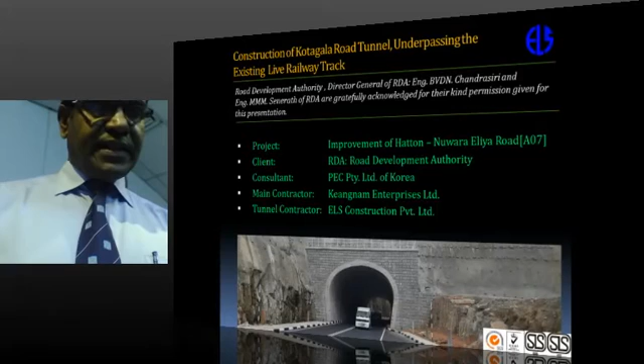The speaker today is Dr. Samaradivakara. He graduated from University of Moratuwa in 1978, obtained his BSc in Mining and Mineral Engineering, then Master of Engineering in Geotechnical Engineering from the same university in 2002, then MPhil in Rock Mechanics from University of Moratuwa in 2006, and PhD in Mineral Engineering from University of Queensland, Brisbane. Those are his academic qualifications.

In industry, from 1998 he joined as Geotechnical Engineer in Engineering and Laboratory Services Private Limited. Later he joined University of Moratuwa as a visiting lecturer, then a full-time lecturer. He then worked as senior project engineer at Newcrest Mining Limited, Australia, and before that as senior geotechnical engineer at ELS Construction Private Limited, during which time this tunnel was constructed. Presently, he is a senior lecturer at University of Moratuwa.

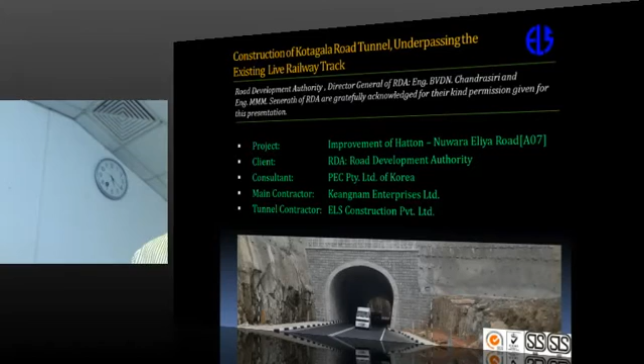The project is the improvement of the Hatton Nuwara Eliya Road Project, A7 Road. The client is the Road Development Authority Sri Lanka. The consultant is PEC Private Limited, Korea. The main contractor is Keangnam Enterprises Limited, and the tunnel contractor was ELS Construction Private Limited.

From a scientific point of view, this is a direct application of geotechnical, mining and civil engineering knowledge and experience. It was our absolute pleasure to work for and dedicate ourselves to this particular project. As Mr. Prabodha explained, this is the first road tunnel built by Sri Lankans.

I have organized this presentation so that even non-engineers can understand it; I have made it very simple. I am going to talk under these subtopics: site layout and background to the project, subsurface profile, safe work practice, slope protection work, and tunnel design drawings. Then tunnel excavation at the Hatton end, that is the hard rock section, and safe tunneling practice, monitoring and quality assurance work, tunnel excavation at the Nuwara Eliya end where we had to practice soft ground tunneling techniques. Then the tunnel waterproofing and tunnel concrete lining. This presentation will take approximately an hour.

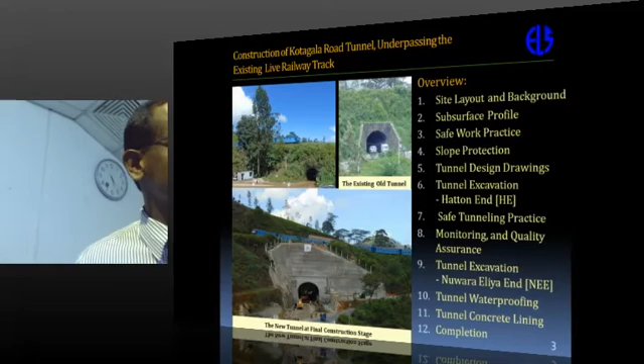This is the former road, meaning the Hatton Nuwara Eliya road. Under this A7 improvement project, it was proposed to improve this to a 2-lane road. The old tunnel shown here is just sufficient for one-way traffic, and it had been a bottleneck on this Colombo Nuwara Eliya road over the years. I checked the history of the tunnel; it's more than 100 years old, and therefore it had been a mandatory requirement to go for a new tunnel to cater to the current traffic demand.

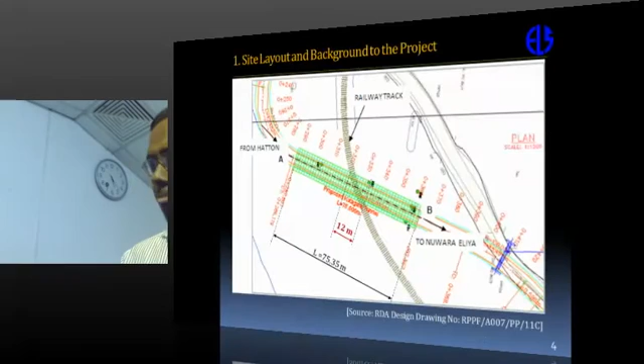The old tunnel is somewhere here, and this is the existing railway track. By the time I arrived from Australia, the tunnel axis and everything had already been finalized and diverted. This is the new tunnel, which after construction we measured at a length of 75.35 meters at the road level.

The most interesting part is this: we had to construct this underpassing the existing railway track, and the railway track doesn't intersect the tunnel perpendicularly, it's on a curvature. Rail to rail, it is just 1.9 meters. Otherwise the length of influence would have been much less, but given this current situation we recognized the length of influence as 12 meters, which is significant, and we had to take precautionary measures to excavate the tunnel under the railway line carefully.

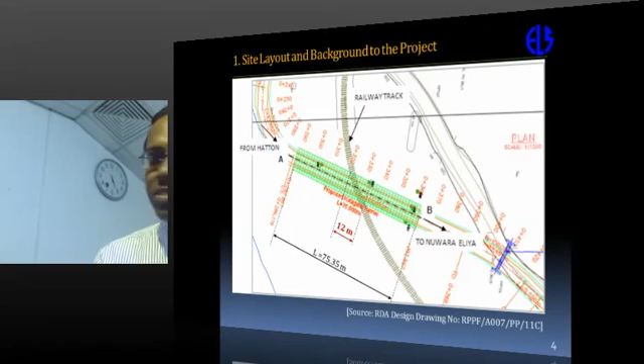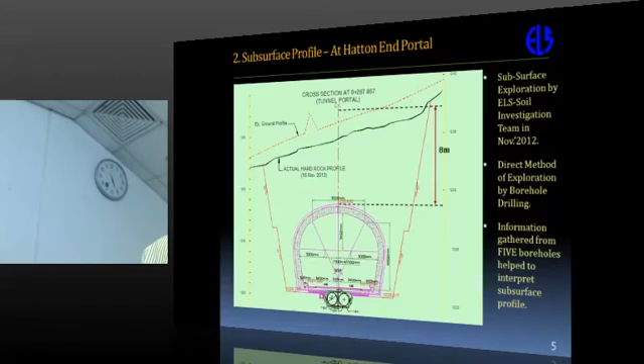This is a borehole. There had been 5 boreholes conducted: one advanced here, the second one BH2 advanced very close to the railway track, and the other 3 at Nuwara Eliya.

This is a sample from the borehole advanced closer to the railway track. It should actually be within the tunnel, because there's an overburden of 8 meters, then 9 to 14 meters. I wouldn't say this is good rock, you can see it is fractured. However, core recovery was 90 to 100%, and RQD 60 to 100%. It is a bedded formation.

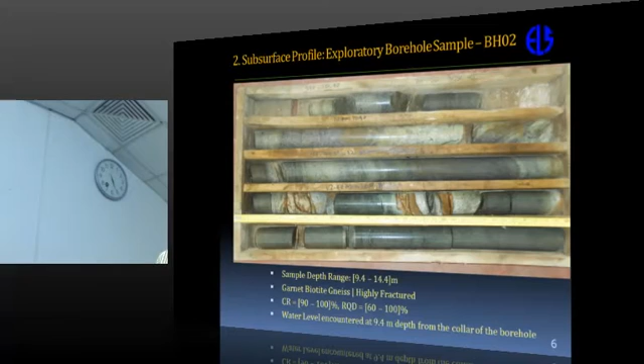Especially for the trench excavation, we faced difficulties during blasting because of the bedded formation.

We recruited more than, sometimes we had more than 120 people on site, recruited especially for this particular project. Actually, 90% of the workers were non-ELS originally. We interviewed and recruited them for this particular project. Then we needed to control them, guide them, and make them disciplined. Therefore, we needed regular communication, especially on the safety aspect.

This is the biggest project. ELS spent a lot of money for safety. Therefore, we looked after workers, and I'm sure we maintained world-class health and safety standards.

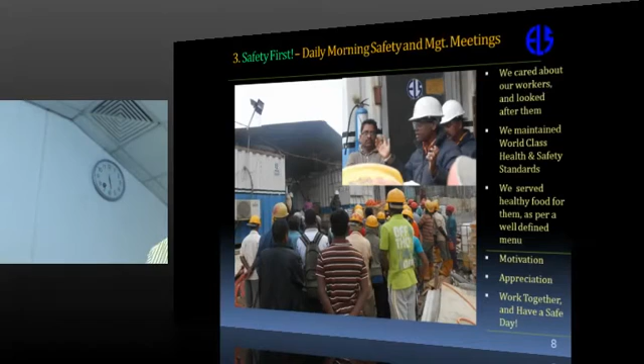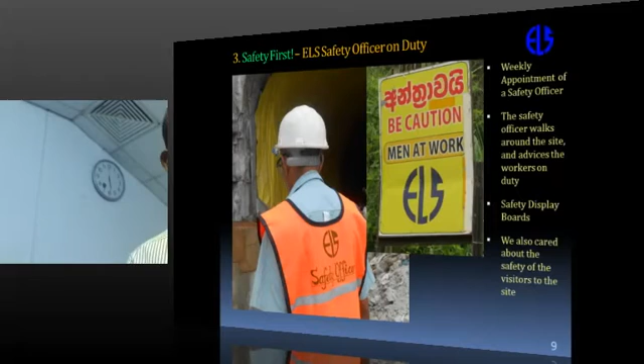We appointed a safety officer on a weekly basis out of our work team, and his role was to walk around and see how the guys are doing, whether they are wearing safety items, and point out any risky thing to the management. That's how we managed safety.

We also established fire safety on site. We installed dry powder fire extinguishers on site as well as at staff accommodation. Not only that, we invited the service provider to come to the site and give on-site training for our workers.

By doing this, we achieved zero accidents and zero complaints by the end of the project. That's a term I learned in Australia. When I landed on a remote mine site in Perth, I could see at the airport: target zero accidents and zero complaints today. It digested in my blood.

Zero accidents we understand, but zero complaints means a lot. If I don't get complaints from my directors, my consultants, colleagues, then it is a peaceful day. I can have a good day.

We practiced this, we tried this, and we understood these are correct. You can see this is a photograph of drilling using a YT23 jackhammer with pusher drill. They are wearing all safety devices.

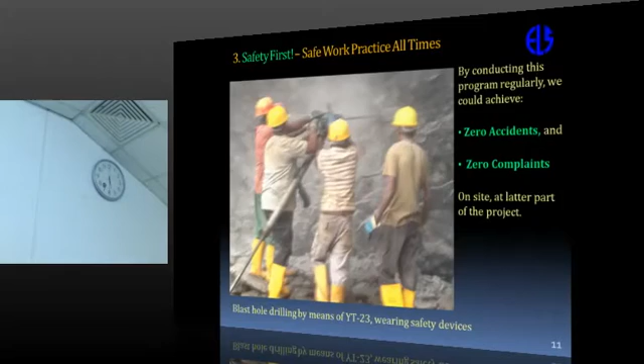That's about safety, and we were lucky actually. There were no catastrophic accidents, just one worker's finger was broken. We could minimize accidents to that level. Therefore we were happy, and capable of celebrating important events enthusiastically because there were no accidents on site.

The access roads also had to be stabilized, because we could see this happening at the portal. At the beginning we didn't have this much rock excavation, however above this soil excavation we could observe it is a lateritic soil formation. However, it is not that stable, there was a chance it could slip. Then we consulted...

We consulted CECB and requested them to come up with a proposal to stabilize this slope before starting the tunnel. We received their proposal to go for soil nailing, and we could stabilize these slopes using soil nailing techniques.

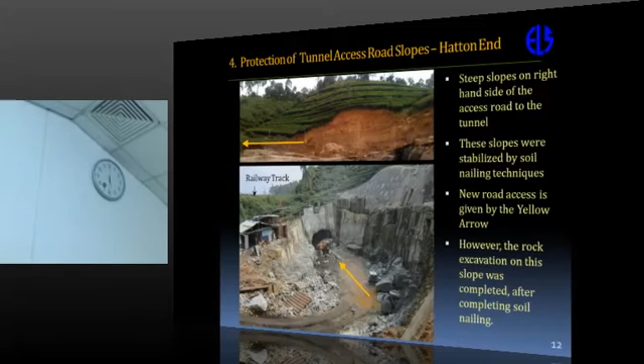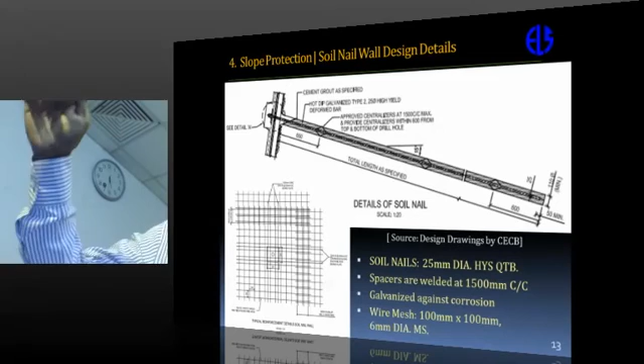Soil nails are made out of 25mm diameter high-yield steel QT bars. We drill 100mm diameter holes and need to place the soil nails at the center of the hole. For that we use centralizers to keep the soil nails at the center, welding these centralizers at 1500mm spacing.

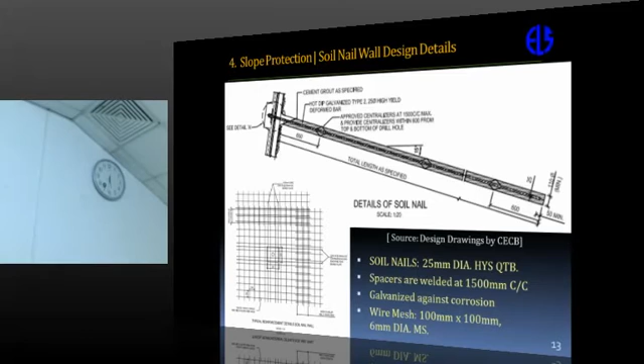Eventually we galvanize the entire setup to prevent corrosion. Then after installation we need to do grouting, and this is the wire mesh, 100mm by 100mm, 6mm diameter mild steel wire mesh, used throughout the tunnel and slope protection work by soil nailing techniques.

This is a close detail of the soil nail head. This is the soil nail and this is the grouted form. Initially we go for 75mm shotcrete, then wire mesh, then all the nuts and bolts and plates, all galvanized and fabricated by us. That's how the soil nail is installed.

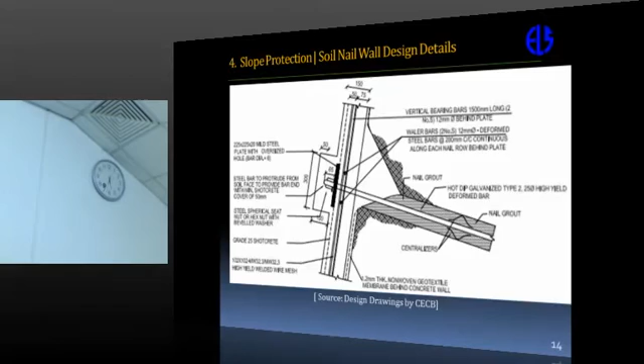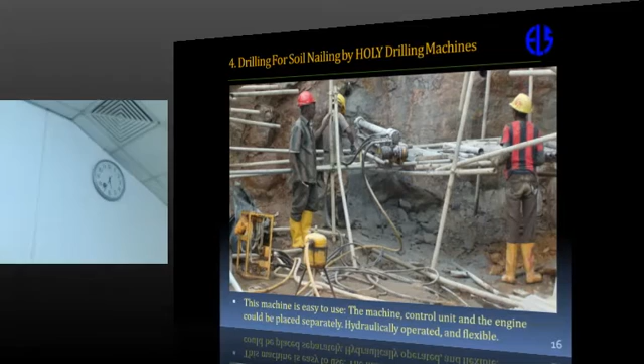This is very flexible, and at the moment this set of machines is being used by ELS for slope stability work at Nanu Oya, close to the railway station.

This is a protected slope at Hatton. You can see the drainage was facilitated by a surface cut-off drain built here, and vertical drains built by means of no-fines concrete. This is under quality assurance work - we have to do 5% pull-out tests for the entire soil nail wall.

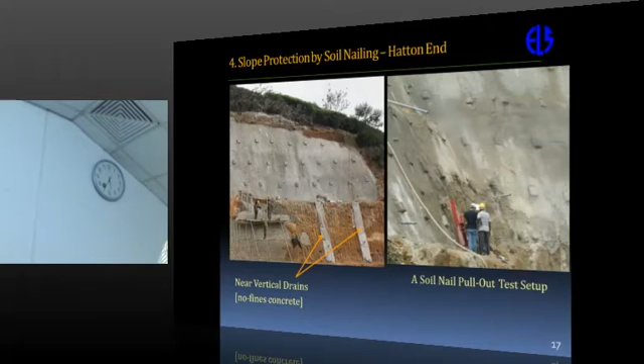This is the slope protection at the Nuwara Eliya end slope, meaning the portal slope itself had to be protected by soil nailing technique. That design we got from RDA. There were minor differences between the CCP design and this design, but eventually the length was increased as it is the same formation.

Soil nail lengths were initially 6 meters, but they were increased up to 10 meters in depth.

This photograph is from Nuwara Eliya, showing the Nuwara Eliya portal slope face. The tunnel was supposed to be here. The stabilization work is still going on.

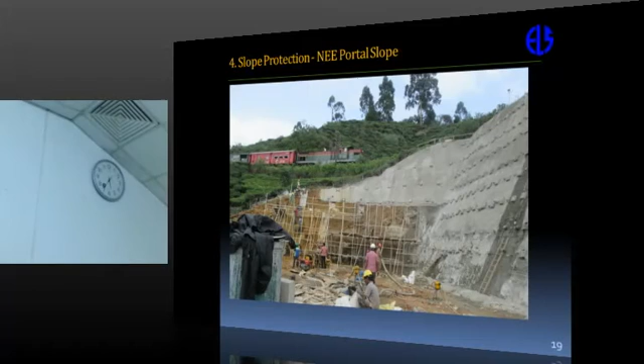I selected this photograph just to show how close we were to the train - it's very close. Once the earth movements from excavation were done, we needed to protect this slope as soon as possible. Our boys worked day and night, double shift, to protect it before heavy rains fell. That way we ensured the safety of the structure.

As engineers we should not restrict ourselves to just the design part, so I've included a couple of design drawings here. Thanks to RDA, I have quoted the source of material. This is actually the drainage we revised later.

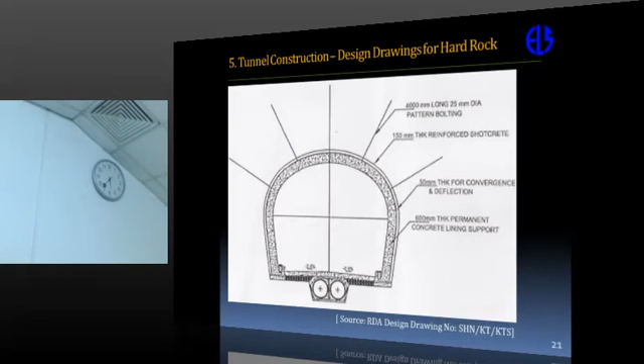It was confined to one single line of 1200 millimeter internal diameter precast concrete pipe. You can also see a lot of pattern bolts in the design, 4 meters long and 25 millimeters diameter, then 150mm thick reinforced shotcrete, 50mm thick for convergence and deflection, then 600mm thick permanent concrete lining support. That is the design for the Hatton hard rock section.

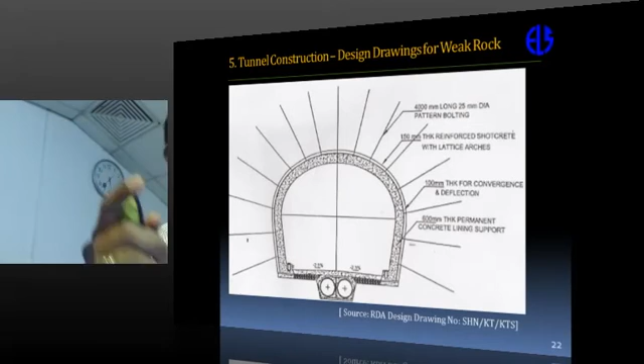For the next section, soft weak rock formation, you can see the number of pattern bolts increased. As part of these design drawings, whenever necessary we have to do spot bolting to support loose formations, installing anchor bolts separately.

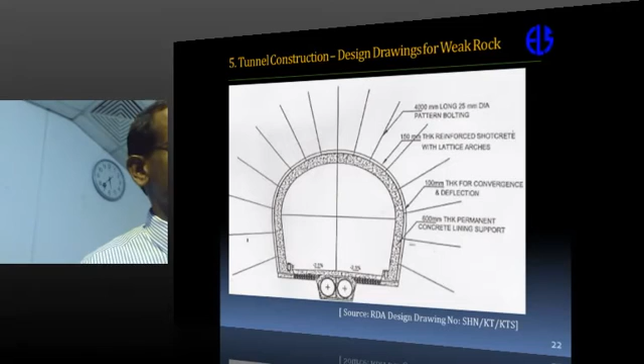When we come to the hard rock section tunneling, we did up to 50.5 meters length starting from the Hatton end, then advanced from both ends. We started from Hatton end with rock tunneling - drilling, charging and blasting - whereas from the Nuwara Eliya end we had to practice soft ground tunneling techniques using lattice arches.

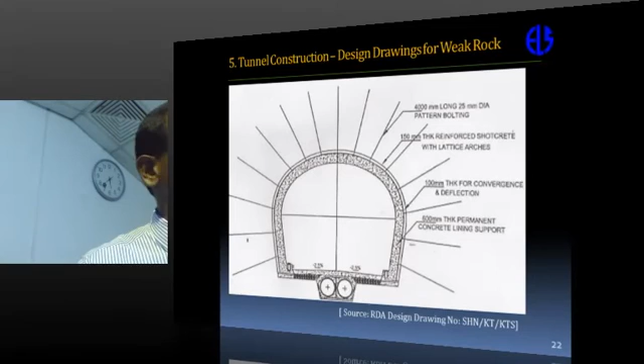As per the design, we had to advance 54 millimeter diameter, 12 meter long heavy duty pipes, which we call forepoles. They were perforated, and after drilling and installation, we did pressure grouting. So you can imagine that a blanket is formed above this level, making stable strata and facilitating advancement of the excavation.

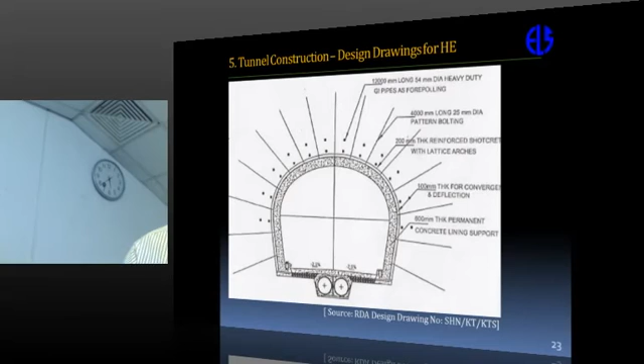These are the forepolings. You can see the actual forepolings we advanced and grouted. After that we started excavation. By that time we had already done slope protection work by soil nailing. Then we started the excavation for the installation of the lattice arches.

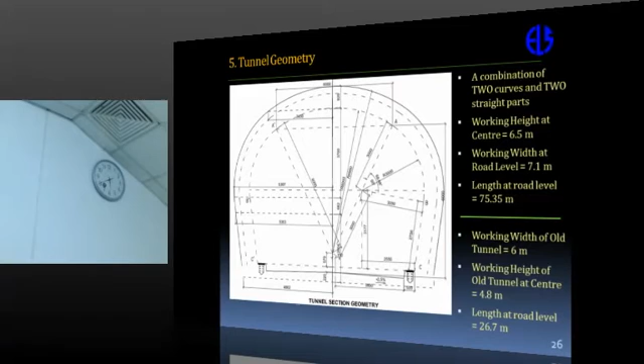After completion, the working height at the center is 6.5 meters, whereas the old tunnel had only 4.8 meter height. The working width at road level in the new tunnel is 7.1 meters, whereas the old tunnel got just 6 meters. And lengthwise, the new tunnel is 75.35 meters, while the old tunnel was 26.7 meters.

This is the fabrication of the lattice arch. Mr. Bandara did this based on his Samanala power tunnel experience. He pulled out his old notes from the Samanala records, and we fabricated this one.

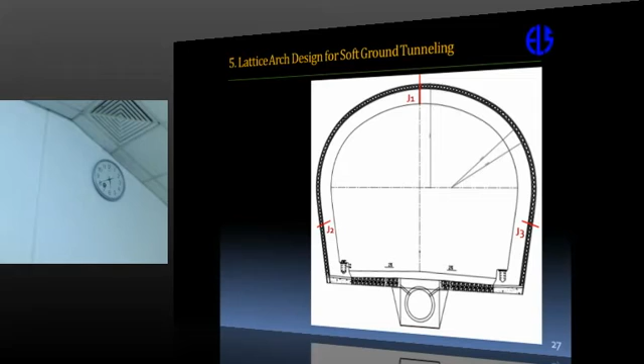We put it here. We maintain 3 joints: Joint 1 at the crest, and J2 and J3, which are at the places I mentioned, the straight parts. The sectional view of it is made out. These were made out of 32 millimeter diameter HYSD QT bars, and you can see shear bars in between. That's how we fabricated this.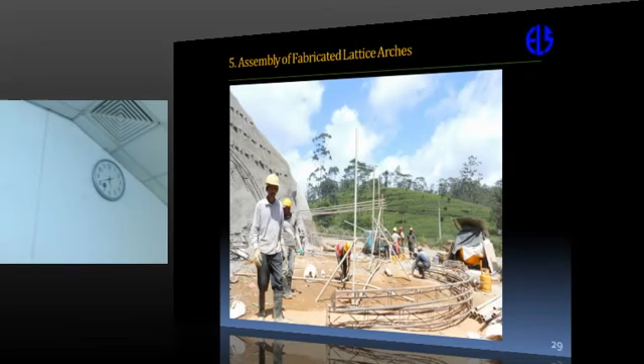As I explained earlier, we moved them in 4 pieces, each lattice arch, and assembled on site. These are the lattice arches, temporary supports for the soft ground tunneling, which we did at Nuwara Eliya.

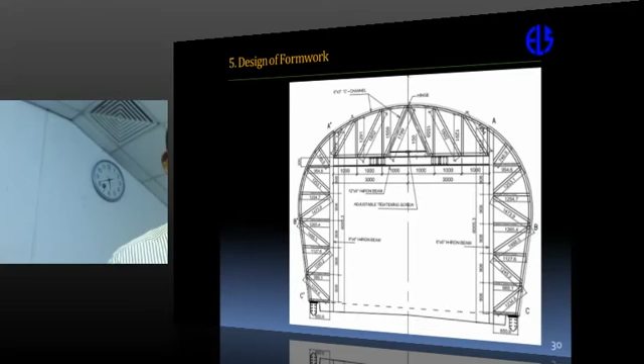The fabrication of formwork for the permanent concrete lining: we use C channels and I-beams for this fabrication. This was also fabricated in pieces at the ELS Bemmulla factory premises, and we moved them in pieces to the site and assembled on site when it was ready for the concrete lining of the tunnel.

These were moved by crane and positioned, and that's how we made the arrangement for concrete lining of the tunnel.

The tunnel excavation was hard rock tunneling in Hatton. We did it in 2 steps. The first part, starting from ground level, was below 4.5 meter height, which we did first. For that we used YT23 jackhammers with pusher legs. We did it horizontally, and charge blast. That was the heading operation, initially only for 4.5 meter maximum height.

Then for the balance 3.5 meter depth, we had to drill vertically downwards, and we did bench blasting for the bottom part. That's how the rock excavation was done.

This shows the YT23 jackhammer. At the moment the company has 11 machines. This is a pneumatically operated machine, and it's pretty heavy. However, when energized with compressed air, the leg itself can raise the machine up, so even a single person can operate it. But at the beginning, for the drill rod, someone should support positioning to the correct drill hole location. Once the tuning up is done, even one single person can manage to complete the drilling.

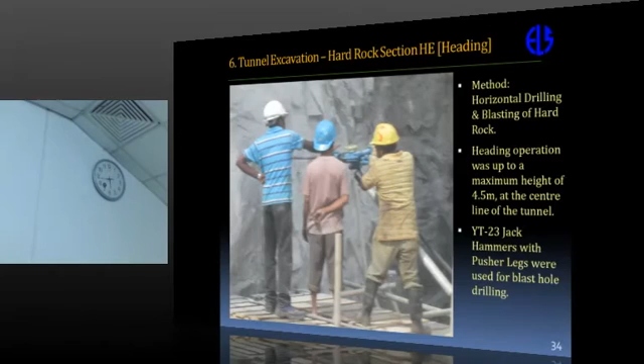Mr. Champika is in our audience today.

Then we consulted a blasting expert, engineer Mr. P.V. Hemal from University of Moratuwa, and he supported finalizing this blast design. Here we use emulsion explosive, which is becoming more popular. We couldn't do blasting carelessly here because we had to take very careful precautions due to the railway track. If it was an isolated location, we could have done faster blasting during excavation, but here we had to take utmost care because of the railway track.

Emulsion is less powerful than dyna, though at the moment dyna is also not recommended. Strength-wise, dyna is more powerful than emulsion. However, from a scientific point of view, dyna emits more chemical fumes during blasting, whereas emulsion has fewer emissions, and therefore emulsion is becoming popular.

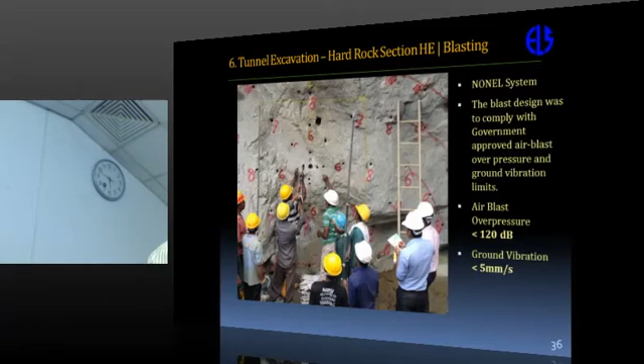These are the parameters for air blast overpressure. We cannot exceed 120 decibels, and we cannot exceed ground vibration of 5 millimeters per second. We were within the limits, and the Geological Survey and Mines Bureau officers cooperated very well. This is our foreman, who played a great role during this tunneling project jointly with Mr. Champika Karunathila.

Further, to stop fly rock and ensure no fly rock came out, we built a shield out of sheet piles, handled by this Manitou crane. We ensured this because there were houses towards this end, in the vicinity, and we needed to make sure that not even a tiny rock would be flown to their houses and cause damage.

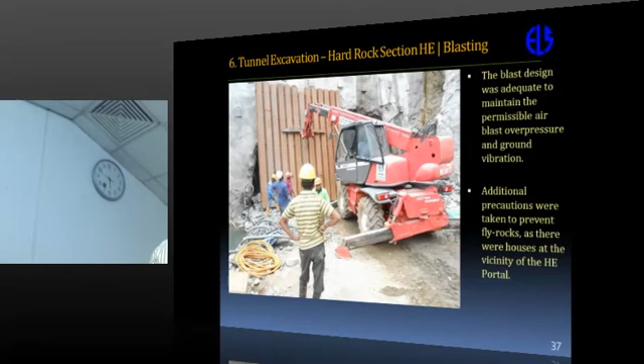We didn't want complaints. We targeted zero complaints, as I explained earlier, along with zero accidents. We always tried to minimize those.

We had to fabricate a bench for blasting, because on this platform we could accommodate 3 drill machines, then 4 drill machines underneath, and that's how we managed to blast that many holes, 194 holes per one blast phase. People worked day and night.

We had accommodated people and organized 2 shifts to work. That's how we managed to do this excavation.

As the tunnel was advancing from both ends, we did regular survey checks to ensure the tunnel was heading according to design and following the center line. Those checks were done regularly, and survey also helped to draw and position the blast holes for the team, along with alignment checks.

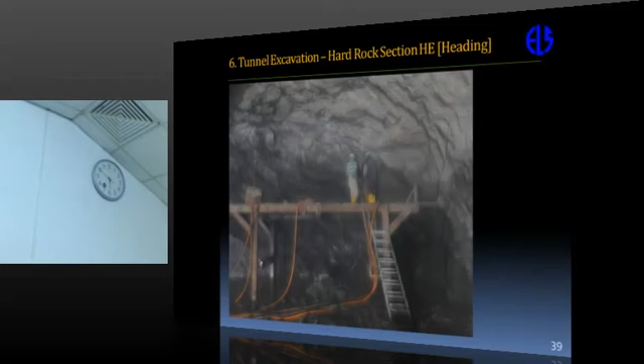You can see here these wires are coming for 3 machines, and this is the drilling platform used to approach higher levels, higher elevations, to drill more holes.

Night shift, whether it was cold, rainy or windy, our people went ahead with utmost courage. Night shift was absolutely very cold up in Hatton, freezing in the morning, sometimes foggy. Even I remember driving back to accommodation when visibility was very poor, after 9:30, 10 o'clock, sometimes following the side white line of the road just to locate it. But people worked very hard during the very cold and rainy weather.

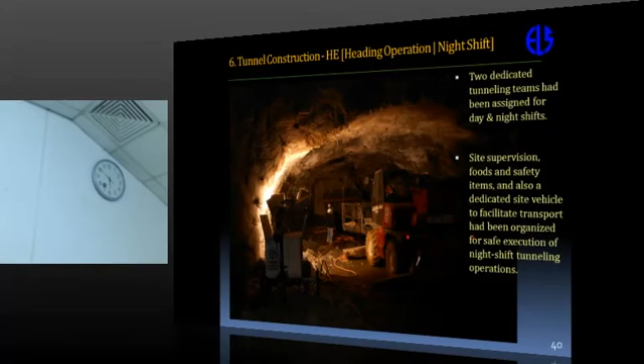Our team was very strong, and they had the enthusiasm to go ahead. This Manitou crane helped a lot, it is a very flexible machine for lifting people, and it also has the facility to accommodate a jackhammer to drill a hole from this cage. That helped throughout the project, and now the company is considering buying a second machine.

We use these for removal of muck from the blasting.

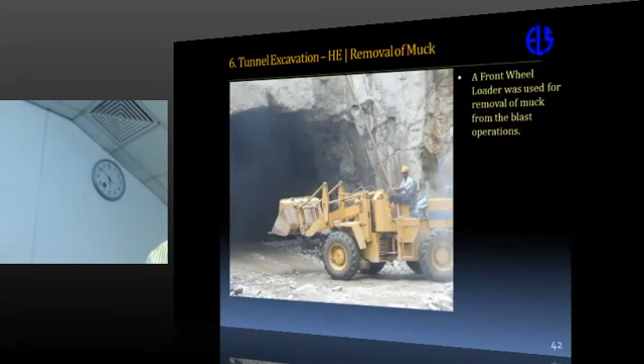After finishing the heading operation, our people started benching. That is, as I explained, downward drilling. It is fast and easy, and it's the general practice at quarry mining or bench blasting.

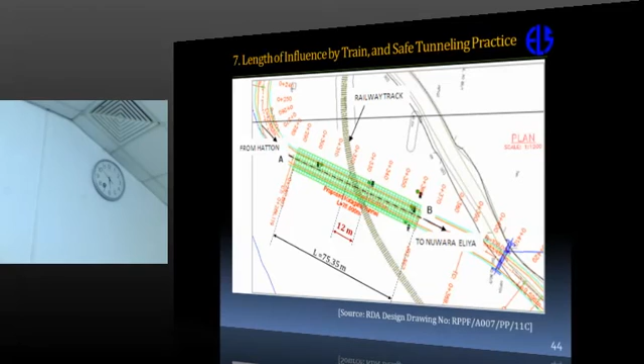Again, I am going to explain the precautionary measures we took under the railway track when we were advancing this 12-meter stretch. The weight of a train engine, needed to keep traction, is the heaviest part of the train.

I spoke to a schoolmate who is an engine driver. I rang him last evening and checked the weight again. He said don't hesitate to mention that the heaviest engine is the 120 ton heavy one, the M10 model which the government recently purchased from India. Therefore, the load could vary from 60 to 120 tons.

It's risky work. However, as per the instructions given by consultants and our basic rock mechanics knowledge, we took all precautionary measures to ensure we drilled one blast hole vertically upwards to check the rock thickness always. We were instructed to make sure we got a 5 meter thick rock layer over it before giving approval for the next blast.

That way, immediately after blast, during the mucking itself, we did supporting of all loosened rock parts. Further, for this particular 12 meter stretch, consultants agreed to give permission to go for shotcreting with a single layer wire mesh.

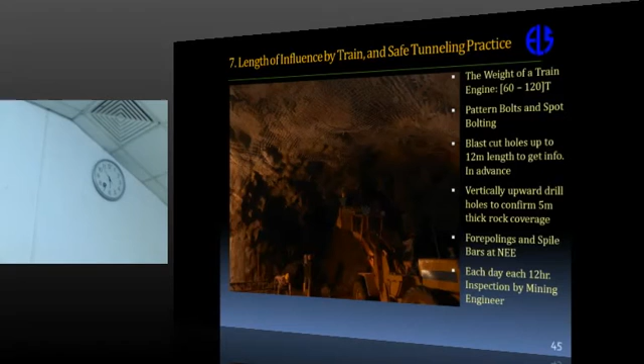The same wire mesh, we used throughout the project. This process means we did a 50 millimeter thick shotcrete layer first, then installed the wire mesh, or in some instances we managed to cut enough metal pieces and install first, then install the net, and simultaneously did the shotcrete. First layer 50 millimeter thick, then the wire mesh, then after, a 75 millimeter thick shotcrete layer.

Further, we have to do convergence and deflection monitoring. That was done by means of a tape extensometer, brand new, which the company bought especially for this particular project. This shows how the measurements were taken throughout almost 25 days.

But these are not significant. The deflection here is 0.25 millimeters. We installed hooks on the excavated surface at regular intervals, starting from Hatton to Nuwara Eliya, and our laboratory staff measure this every morning to ensure there are no significant movements in the excavation.

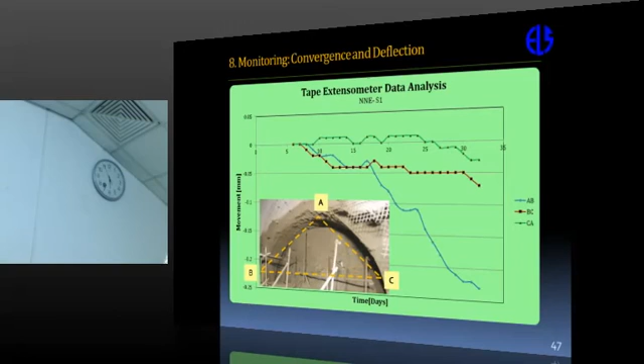This is taking of tape extensometer readings. This is a specimen of anchor pull-out test result. Similar to soil nail anchors, we did a lot of rock anchors, and we had to do quality assurance work by conducting pull-out tests.

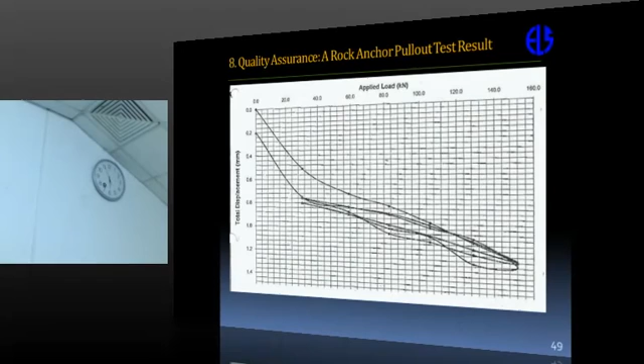It had been designed for 150 kilonewtons. You can see once we release the load, it has returned up to 0.2 millimeter deflection, which is negligible. Throughout the project, we maintained this quality assurance work with the presence of the consultants.

Again, the quality assurance of wet shotcrete spraying. We always cast panels out of the samples we used for wet shotcrete spraying. We had our own facility to do the coring and testing with the presence of consultants, and we did all testing at the consultants' laboratory.

Then for concreting, we did cube casting followed by testing to achieve the design 30 megapascals within 28 days. Then I would like to explain the tunneling process, so on tunneling.

You can see, after flow protection and forepoling, doing pressure grouting, only then we started excavation. We had been permitted only to attempt 600 millimeter excavation at a time, and then to install the rib or lattice arch. We had to do a lot of pattern bolts, grouting, shotcreting, then only we were permitted to advance further.

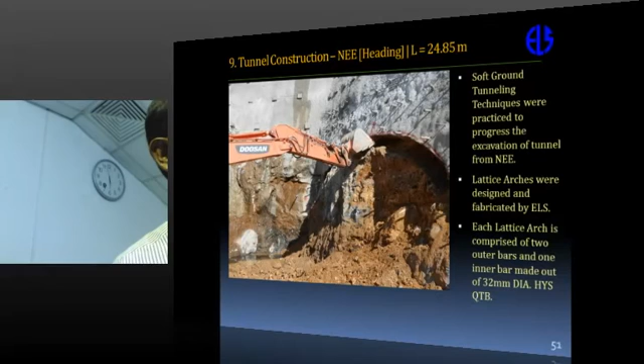You can see the soil here, it's highly decomposed rock. Another problem at this end was seepage of water; a lot of water was seeping at this end. Once contaminated with water, this soil drops like in lumps.

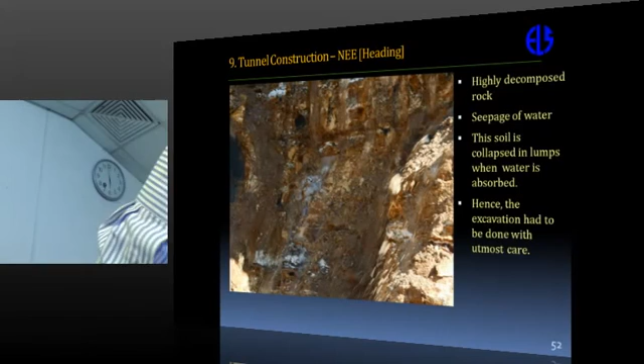When you try to excavate slowly, the soil drops. Therefore we instructed workers to look after them and wear safety devices, and we had to do it very carefully. After installation of a lattice arch, further excavation we also did very carefully.

You can see here, after installation of the first lattice arch. I put this diagram to remember that we need to do a lot of pattern bolts, drilling with a YT23 jackhammer to install these pattern bolts. Then we need to do grouting and shotcreting before advancing further.

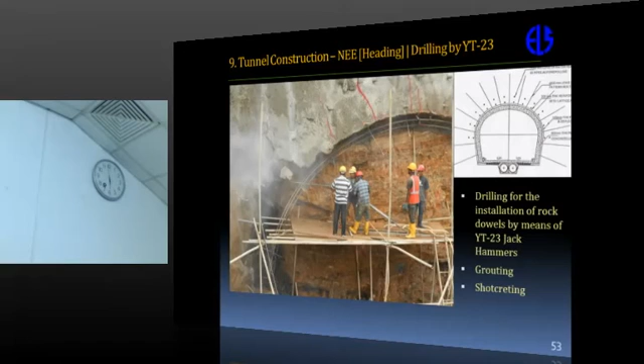Even though we planned this absolutely for soft ground tunneling, we encountered some rocks on and off. That was another trouble, because when we tried to cope up with the time schedule, we had to figure out how to do this blasting. The rock was not soft on the left hand side, the hilly side, that is competent rock, hard rock. We cannot take it simply from the excavator bucket. It doesn't work, so the next step is we need to go for control blast.

This has to be done very carefully, because if the blasting vibrations are significant, then collapse can happen. No one can predict the extent. It could come right from the top, and it will be a disaster. So it's something to be done very carefully and patiently.

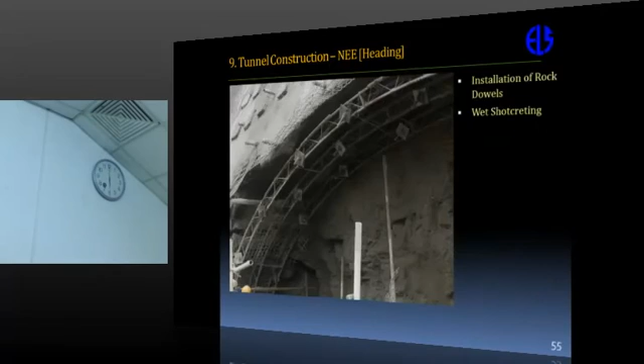This shows that after installation of these lattice arches, we have to do shotcreting. Then the bottom parts have over-excavation. This means sometimes we couldn't control the excavation to perfection because it's rock blasting. We need to balance things, rock blasting and excavation, and we need to advance forward also.

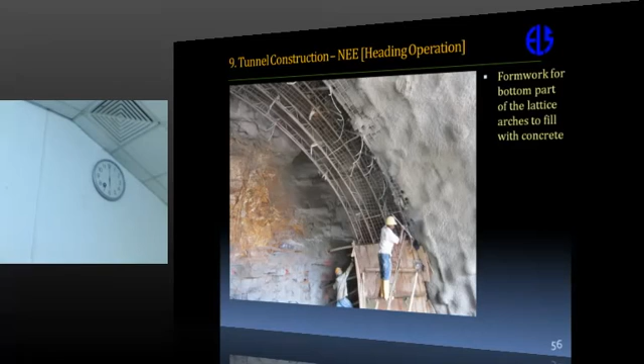We need to advance forward also. There were some extra excavations here. In such instances, we have to put some formwork and fill with either concrete or shotcreting as advised by the consultants. The wet shotcreting is in progress.

This wet shotcreting pump was brought brand new by ELS for this particular project. I was very lucky to work for this project.

It was the first job also I did. Still I have got connections with them because they work very fast.

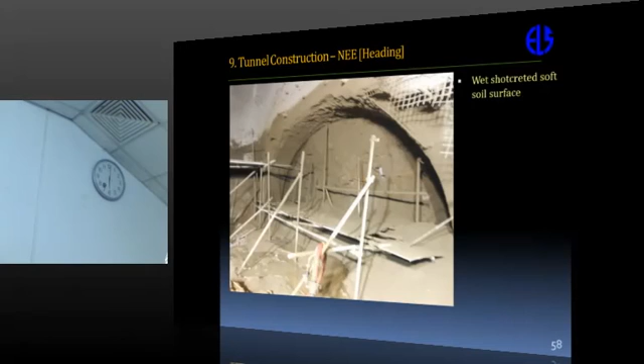When the soil ground condition was not that good, we did the shotcreting for the soil surface as well for safety. Then only we followed with the excavation.

The mobile crane, we shared at both ends because that was the most useful crane on site.

Nighttime work. We had diesel powered light generators. Sometimes during the night shift we got more light than daylight. They were that powerful, the entire area was illuminated. I think psychologically there's a big advantage for the workers because they feel like it's daylight. Honestly speaking, they were very, very powerful, and we got more light than daylight at nighttime because of our diesel powered light generators.

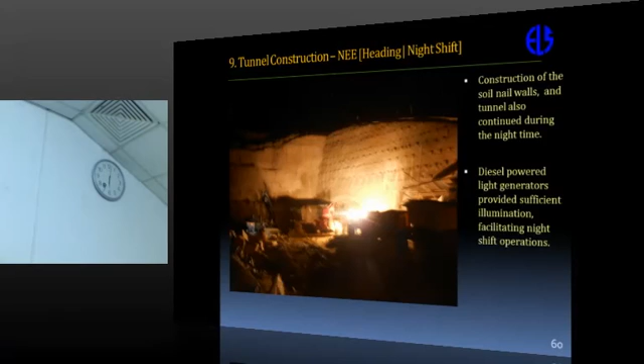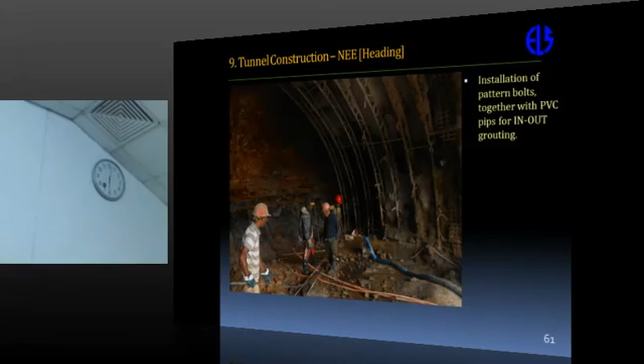This shows the installation of pattern bolt. This person is holding a PVC pipe for in-out grouting, because when we insert the anchor, we always connected the PVC pipe to facilitate in-out grouting. After the installation, we ensure that the grout is filled from the very bottom, the very end, to the nearest place of the hole.

Again, another control blasting at Nuwara Eliya. Once they finished the heading operation there, after installation of lattice arches, they again started drilling downwards for the benching operation, and removal of muck. Luckily this time, as it's the hill area, the railway track is somewhere here.

You can see we encountered rock. Therefore we didn't want that straight part of the lattice arches for this section. The rock itself supported the lattice arches. Anyway, they are temporary supports.

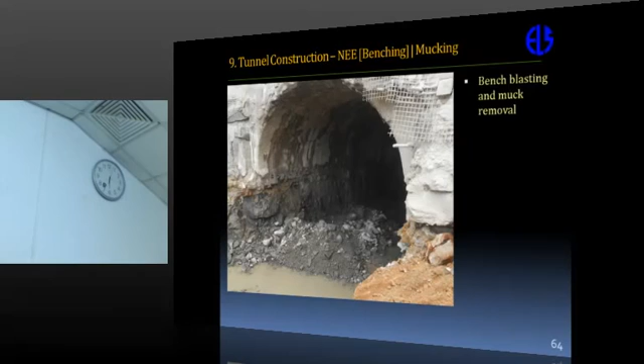We have to do waterproofing to look after the durability of the permanent concrete lining of 600 mm. For waterproofing, we had to bring down foreigners for this. The company bought all the devices necessary for this.

Surface smoothing is mandatory for this work. Otherwise, we have a doubt that during the permanent concrete lining, the concrete pressure would deform the membrane. Therefore, a smoother surface would be better for installation of waterproofing membranes.

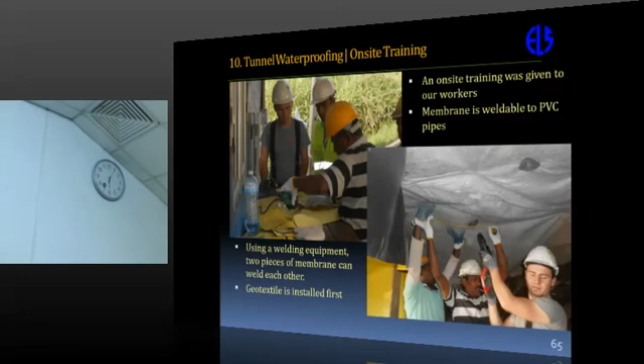You can see a lot of aluminium ladders, anyone could easily walk up safely. That's how we did this job.

This is the waterproof area of the tunnel. On the left hand side it is 30 meters, whereas right hand side is 51 meters in length, depending on the seepage of water.

At the bottom, when water seeps, it is absorbed by the geotextile membrane and it seeps through up to the very bottom of the waterproofing membrane.

In the end we need to connect this to drainage pipes. Luckily this membrane is weldable to PVC, so we could easily weld it perfectly to the PVC. We had two longitudinal pipes and lateral tiling pipes at 2 meter intervals. That's how the drainage was facilitated.

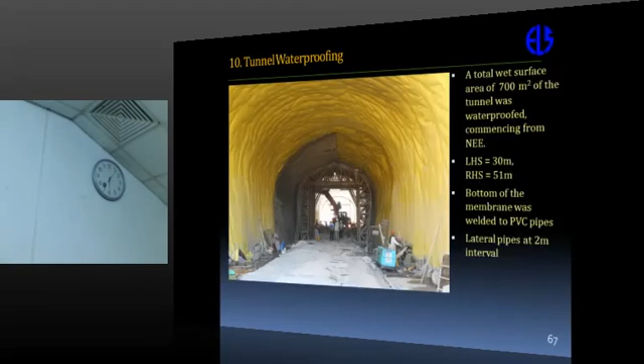Then we started tunnel permanent concrete lining. It started from the Hatton hard rock section and advanced up to Nuwara Eliya. Meanwhile, the people finished waterproofing work at Nuwara Eliya.

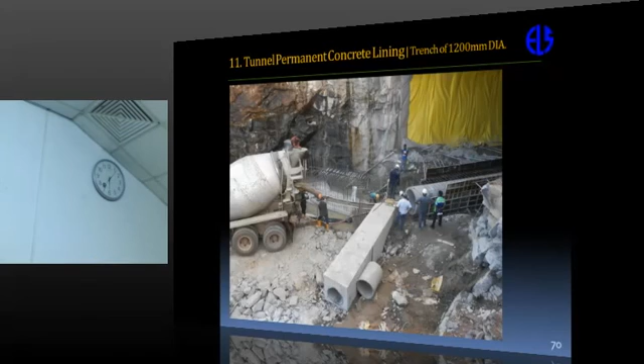This is the trench, 1200 millimeter internal diameter, a precast pipe from ELS again. We have to do a box culvert here. People worked day and night, and they did a great job.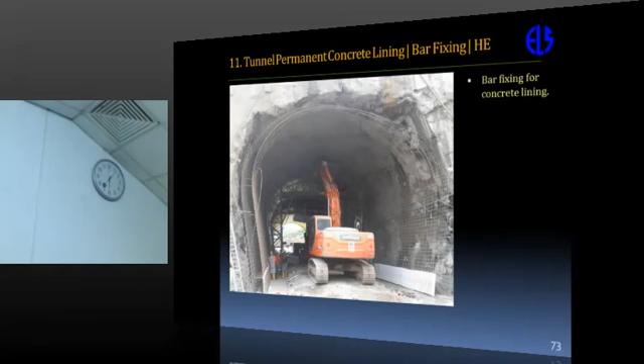This is bar fixing for concrete lining at Hatton. You can see we brought this and dressed up the Manitou again to help for this work. Then after we placed the frames and did concrete lining.

Now here at Hatton, the bar fixing work could be easily supported by rock anchors because it is rock. However, for the waterproofing membrane section we couldn't drill further because it needs to be watertight. Therefore they were supported to the formwork themselves.

There's nothing to collapse. We also supported them, we also shared the pressure with them. That's how we kept the motivation to go in. Still, I get some appreciation from the workers, and it has been a memorable day for them.

I went to find fireworks, but I couldn't find any. Eventually I brought tiny fireworks, and we had to use strings here just to guide them, otherwise they go here and there. Then I asked the hardest working people to come forward and fire this. They captured photographs of this. It was a pleasure for us, and we also joined them and enjoyed this day.

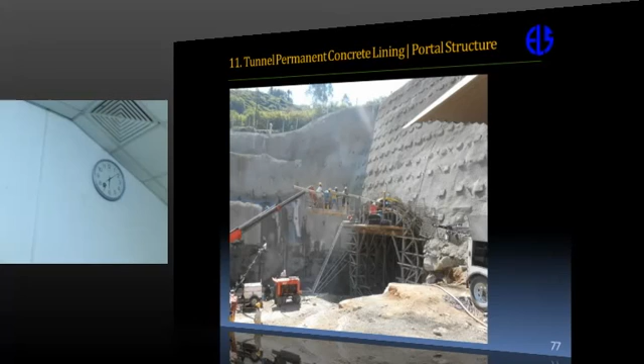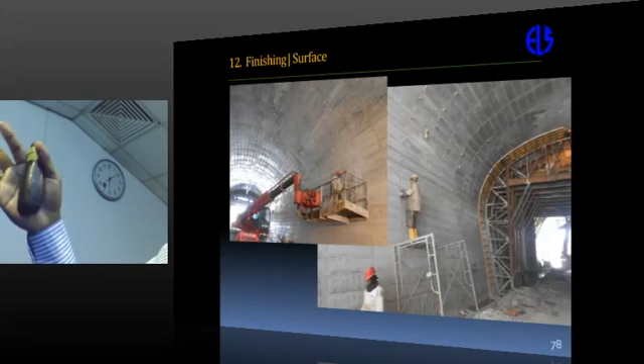Then we started finishing the portals. This is the concrete lining of the portal, and from the rail we did it in 12-meter segments. We completed the 12-meter segment and started removal of the formwork, then started finishing work. These people are doing some minor grinding and finishing, or smoothing the surface.

That work also continued day and night. Then the finishing of the tunnel portals for the durability and also the appearance. We brought down a supplier who goes from quarry to quarry and selects rock pieces. One side is fairly flat, and he cuts into 1 foot pieces. These pieces he brought down, and our people fixed them manually.

This is the finished tunnel. Then after we had to do lighting. We brought them down again from overseas, LED lighting, a very economical lighting we did with the help of the supplier.

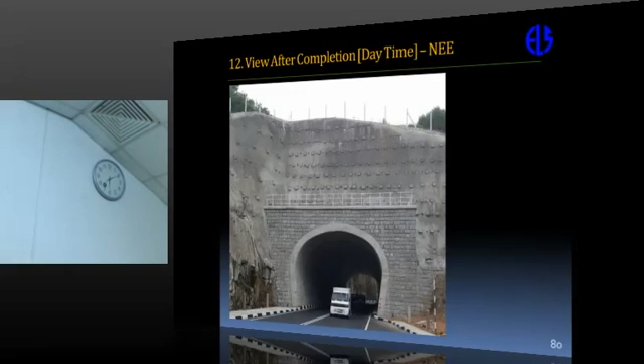This is automated, meaning a combination of a clock and a sensor. Clock time is from 6 p.m. to 6 a.m., 12 hours. However, if there will be bad light or cloudy weather, then the sensor triggers this and illuminates even daytime. Even though we illuminate all 7 together, it doesn't consume 1000 watts.

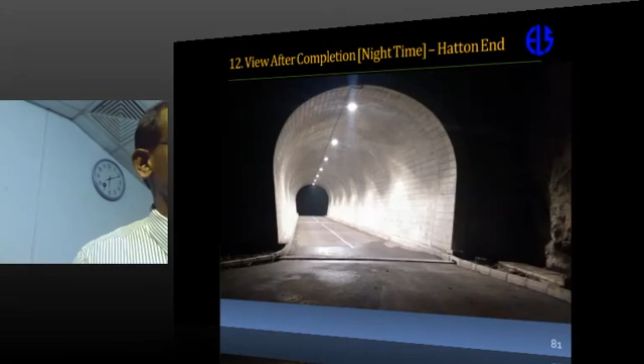Then our consultant, Engineer Mr. Atukorla, he visited quite often from the Uma Oya project site, and he helped us. Then Engineer Mr. Hemalal was our blasting expert. He is one of my teachers also, long ago, and he very cooperatively helped us to finalize the blast design.

Then from PEC Private Limited, Engineer Mr. C.D. Kim was the team leader from Korea, and Engineer Mr. Palitha Ekanayaka, former deputy team leader, cooperated very well. He is a very good, positive person, and he gave his fullest support to execute this project to success.

K&M Enterprises Limited, Mr. Y.H. Khan, project manager for the big project, A7 Road. He's a good person, and he enthusiastically helped us and cooperated very well. Mr. Shin, Mr. Anushka Vidana, and blasting engineer Mr. Chandana - they all helped us, and that's how we could successfully complete the project.

Safety measures taken - I showed you that there was continuous monitoring, quality assurance work, and additional precautions we took when advancing under the railway track. One single layered wire mesh for shotcreting. Immediately after each blast, our mining engineer's role was to do 12-hour continuous inspection. Whether there was any weak formation or loose rock fragments, we immediately supported them - we drilled through them, supported to the hard strata, and grouted the rock anchors. That's how we ensured it was pretty safe.

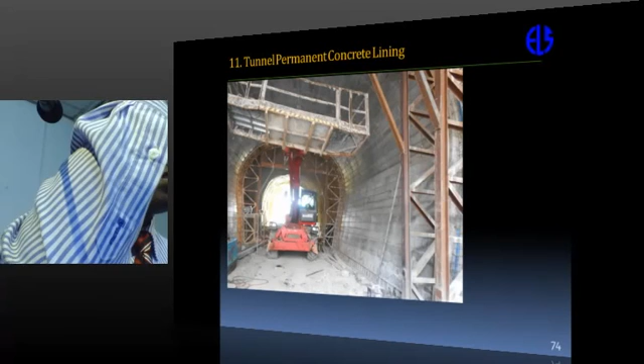As I mentioned earlier, we instructed the blasting foreman that when drilling the heading operation forward, to drill one hole at the center line upwards 5 meters, to ensure that 5-meter rock thickness is there. We also asked to collect all rock cuttings and log them, keeping a close eye on what cuttings were coming and which formation was there, because a detailed investigation is not economical. One borehole costs big money - that's why they did 5 boreholes according to the budget. Otherwise we'd be very happy to have boreholes at 1 meter intervals, but it's not going to happen.

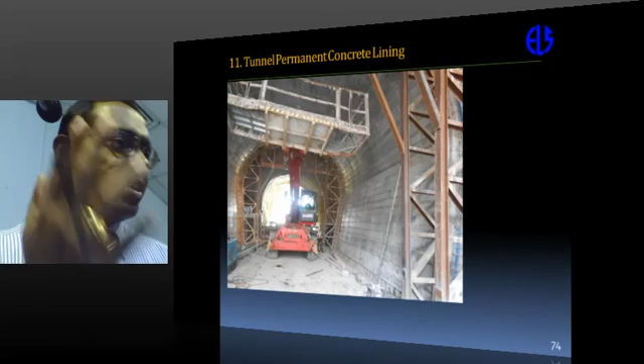As an alternative method, we did continuous monitoring with additional holes to see the rock strata, logging, quality assurance work, anchor pull-out tests, and additional precautions under the railway track. Also convergence and deflection monitoring to ensure there were no movements, because visually we cannot see - there could be a movement, and if so, it should be measurable. Those were the safety measures we took.

We also held safety meetings every morning, inducting our workers and discussing any minor incident that happened the day before - why it happened and what precautions could stop it recurring. I always wore my safety spectacles - Mr. Mangal Sanrat is a witness - whenever they came to site, helmet, boots, gloves, we became role models for the workers. That way we encouraged them to wear safety devices, and that's how we looked after them, with no accidents on site eventually. We are happy and people were happy - it's a clean, nice site. Now you can go and have a look.

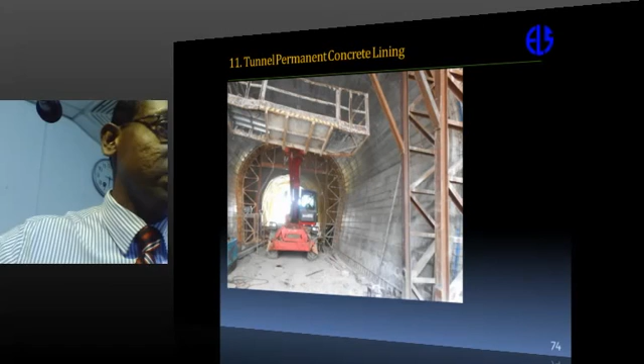No - the formwork, the frame is made of C channels, a combination of C channels and H-beams, but I couldn't explain it properly, sorry about that.

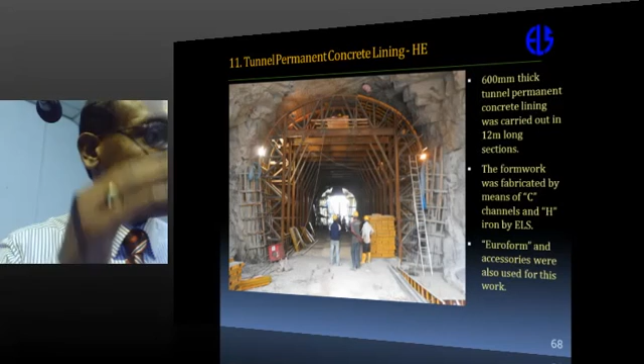The structure is steel, however these yellow pieces are Euroforms. We brought down a full container of Euroform plus accessories from Korea. Can you see here? According to that, the curvature is achieved by taking Euroform sheets and fixing them like that - eventually it becomes a perfect surface. Now the structure is metal, but it's a soft form, meaning a replaceable form - like plywood, similar to plywood but with a coating or something. We can replace that part, but the main structure is steel frame.

When I go to site now, I cannot imagine whether we did it or not - that much work. Now it looks like a piece of cake, but it was full of mud, coldness, and a lot of troubles.

Any more questions? I just got a question. Yes, it's part of the presentation. Oh, excellent, thank you very much.

My friends have done this one, and more than anything, we gained confidence in our people. You remember, 30-40 years ago there were people doing tunneling work with machines. We as people lost that staff, but when we lost it, the opportunity came about. So at last, I'm very, very glad to see, and particularly glad to see my friends doing it, and congratulations on the great job. Excellent, thank you very much.